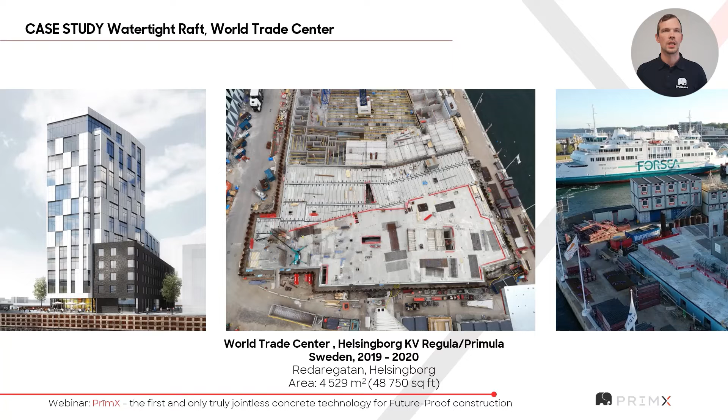So a bit about project specifics. The execution time was from November 2019 till August 2020. The total area for the raft foundation was 4,529 square meters. Thickness of the raft foundation was 350 millimeters. In local places, the deepenings were to 450 millimeters.

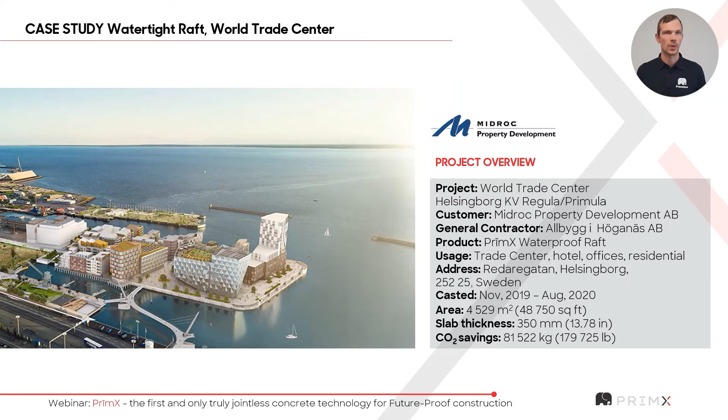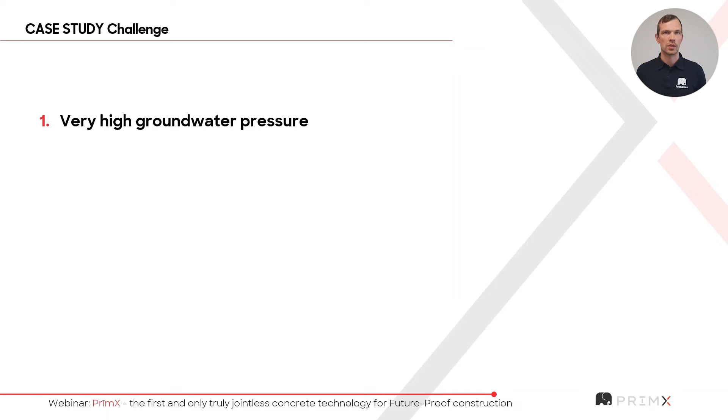So, what was the main challenge in this project? The challenge for the PrimX team was to redesign and build a watertight raft foundation in a building with very high groundwater pressure. According to project design, the foundations of both buildings have a common basement area, which is located at the very corner of the harbor. This unusual waterfront location resulted in a restricted job site area with limitations concerning construction materials movement and storage place.

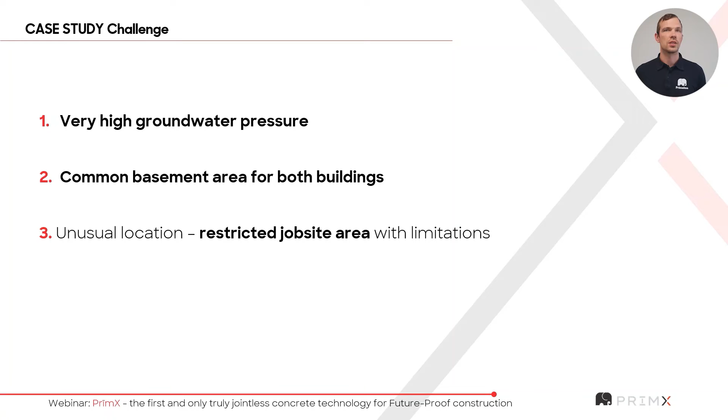If this raft foundation construction would be executed as a traditional steel mesh reinforced structure as it was intended initially, there would be loads of steel reinforcement needed, meaning time-consuming and difficult material deliveries, huge storage place needed, dangerous unloading and daily reinforcement tying works for construction workers.

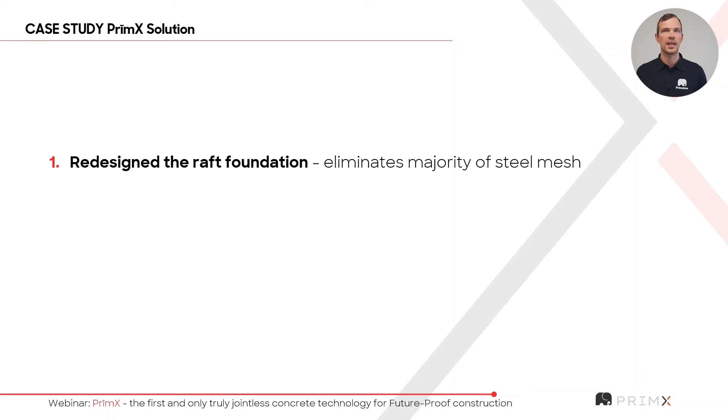So, what was our solution? We redesigned the raft foundation in PrimX concrete technology. It allowed us to eliminate the majority of steel mesh by replacing it with PrimX designed steel fiber reinforced concrete. PrimX concrete technology uses steel fibers in combination with proprietary shrinkage compensating additives that allow us to construct watertight structures. That in turn allows us to eliminate the need for the waterproofing membrane, in return saving a lot of money.

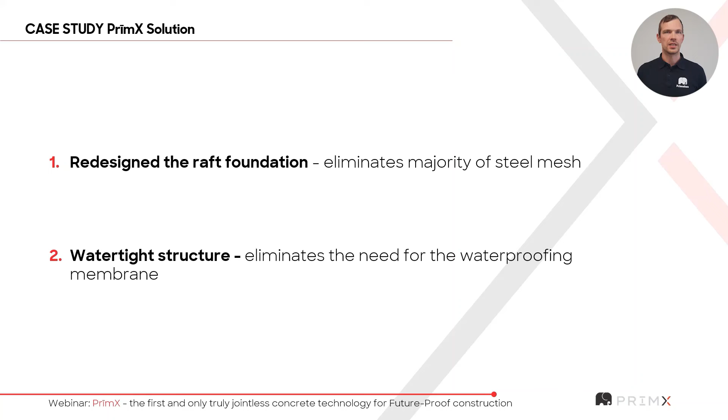So, summing up the benefits of using PrimX design in this watertight raft foundation. We significantly reduced the steel amount used in this project by saving 246 tons of steel, which is roughly 40% of the steel that was planned in the initial traditionally reinforced design. By using less steel, we saved approximately 2 months in construction time.

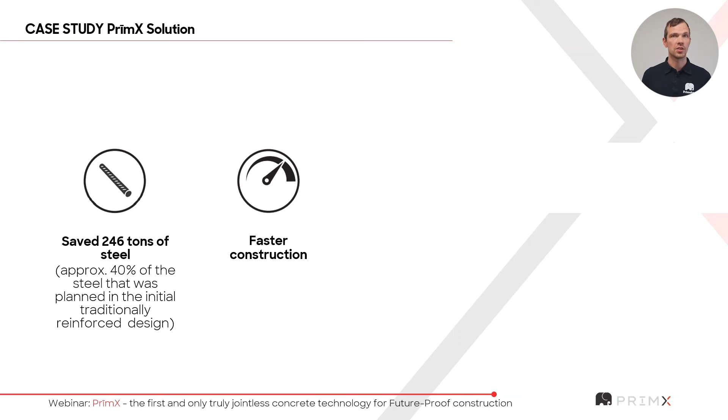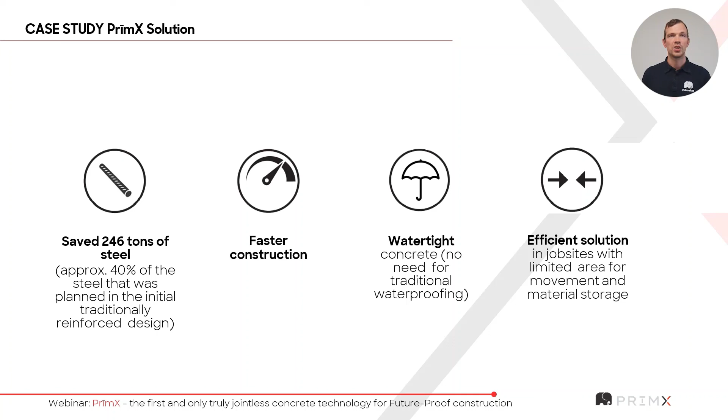Removal of the waterproofing membrane that was planned in the initial design also generated significant cost and time savings. By having less materials at the job site, we successfully solved the initial problem of complicated logistics and limited storage space for the materials.